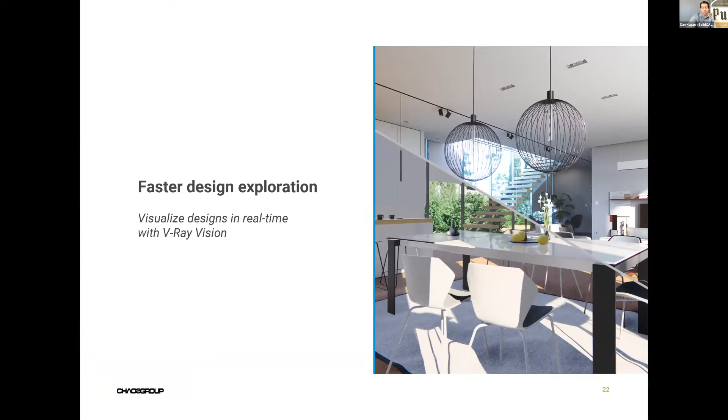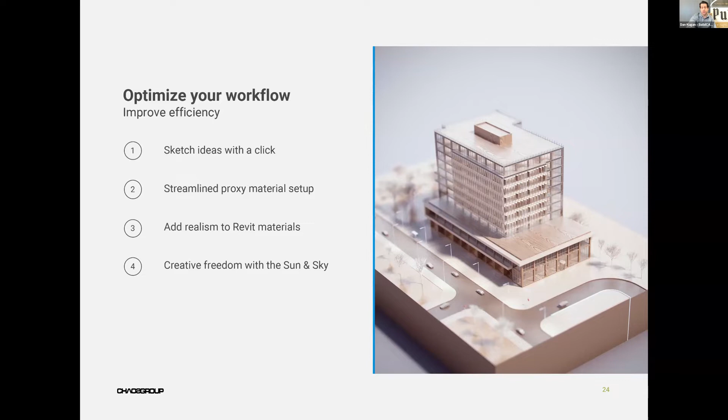Also, a reminder that V-Ray 5 for Revit will be officially released on February 23rd. I know there are quite a few users out there still loving V-Ray for Revit, so here's a quick sneak peek of what's coming. You'll see improvements on the GPU and CPU capabilities, more of the programming improvements from V-Ray 3DS ported into the Revit platform, improvements to the material library, and the ability to use V-Ray Cloud for fast tracking your rendering.

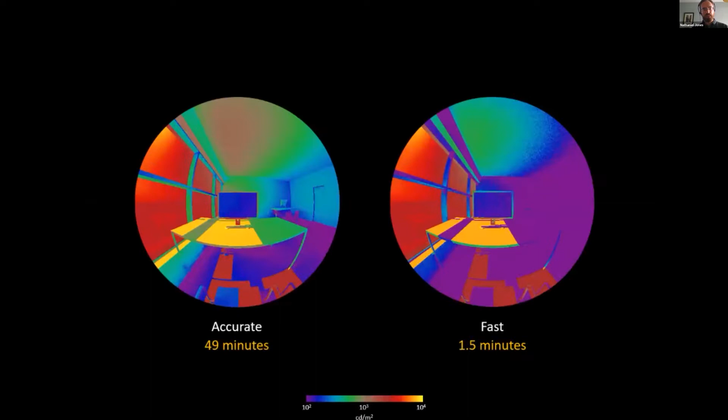I have a lot of experience working with tools in the lighting area, so I thought I'd show an example. Here you have a very accurate simulation of the luminous environment in an office, which took about 49 minutes to run. It's shown here in false color, so you can get a true idea of the range of light levels in that space.

And next to it, a relatively fast simulation, just a couple of parameter tweaks in order to get it to run quickly. But the result of running it quickly is you get a lot less light in there. If your goal was to make a decision based on that, you might see there's not enough light, and so you go and make larger windows, which could expose you to the possibility of overheating or glare. So do we want those models to run fast?

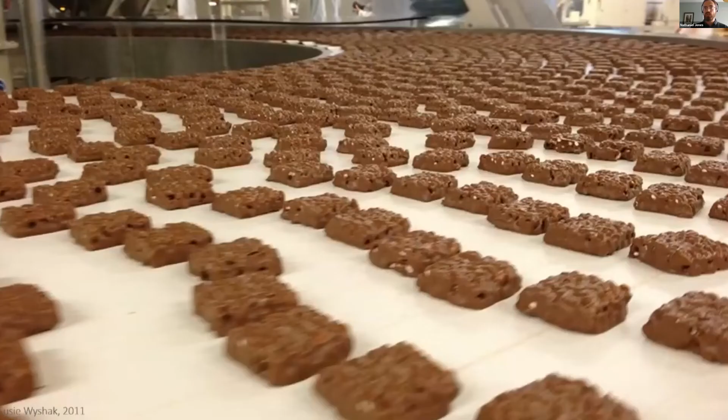So I want to contrast that with what happens on a production line. You need to make a whole lot of something at the same time. You end up with this conveyor belt and you're just mass producing it. That's a very different environment from that classic chef. And computers can do this too.

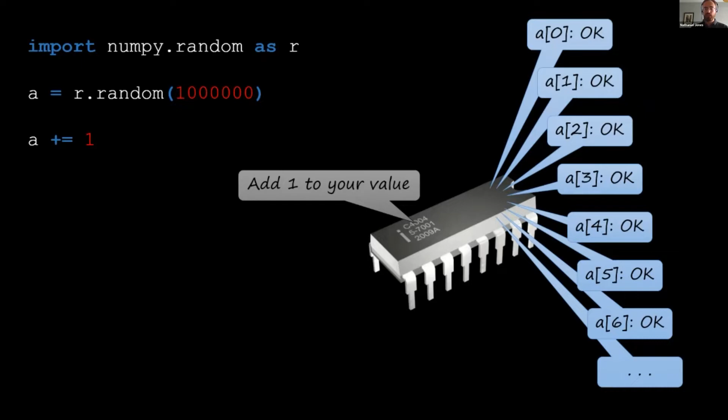So let's take that same array and just give it the instruction: add 1 to everything. The computer sees it like this. It gets this instruction, add 1 to this value, and all the addition registers say okay, and they do that to their value. Now we're replacing that for loop that took many steps to add 1, and replacing it with a single instruction. That can be significantly faster. In fact, on my computer, it turned out to be 30 times faster to do that than the classic for loop. This is a model we call single instruction, multiple data programming, or SIMD.

It's that SIMD programming. I want to go one step farther, and for this I have to go to a different language.

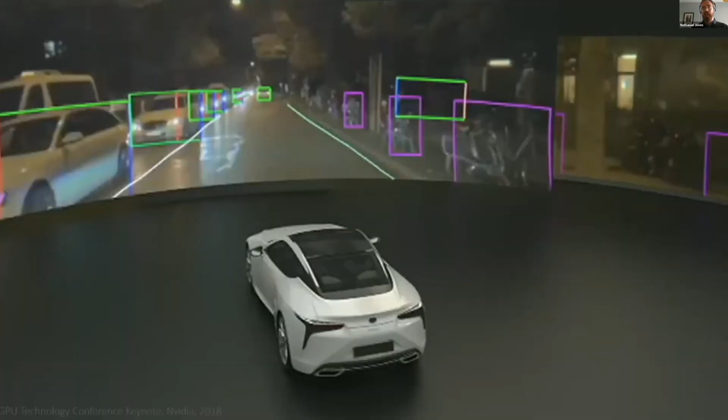That's done some really amazing things. Take this example again from NVIDIA, where they're training machine learning to understand the environment around a self-driving car. This car has to process everything happening around it. The scene it's in is a simulated image - it's not actually driving anywhere. It's just seeing this computer-rendered virtual environment.

It's using image processing to understand that virtual environment and identify the objects there, and then using that to control the car. The car itself is also virtual in this case. So you have 3 virtual elements interacting together in real time, so the real car can someday use that information to drive itself.

So all this is really amazing, but getting back to the question of designing a building, do faster tools make a difference? I mean, we know we like it when we can do things faster, but does it really help us? Does it make us design differently?

I tried to answer this question with the help of MIT Professor Les Norford. And I bring up his help because the one thing he did that was really great for me is he went on sabbatical and left his office empty and unlocked. What can happen if you're a university faculty and you leave your office unlocked is that some grad student can come in and set up a human subjects experiment in your office. And that's exactly what happened.

I brought in some computers and brought in 40 students and asked them to try to solve this problem where they had a mock-up of a room, and they needed to design it to have a nice luminous environment—enough light to work by and minimal glare.

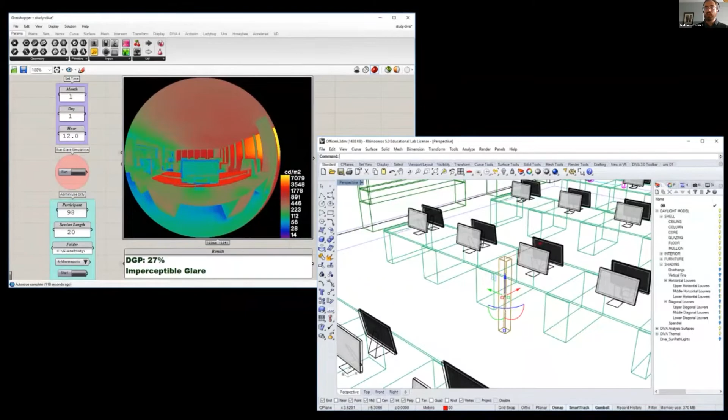The other method was using this tool that I developed called Accelerad-RT. The idea here is that you can move around as if you were in a video game. It's constantly rendering the luminous environment around you, and you can use that to edit the model to add in shading devices and see if you can create something that looks like it will have a better visual environment.

So adding in these blinds, changing the number of blinds in there, and then moving around to different parts of the scene to see if you can come up with something that you're happy with.

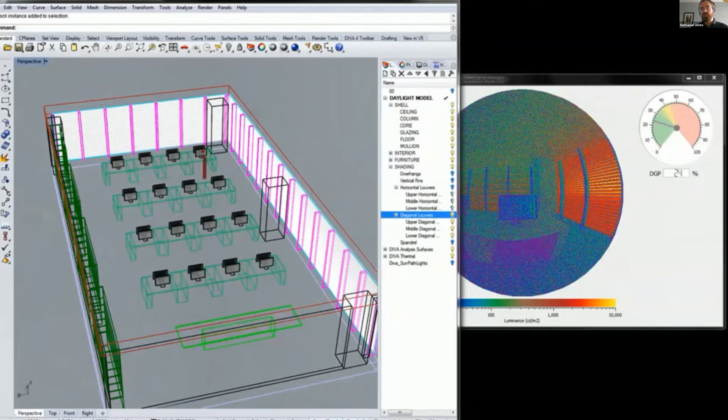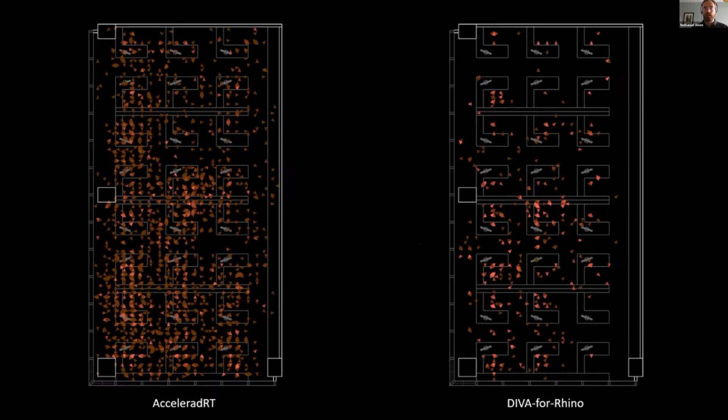So did this make a difference? One thing I found is that it changed the number of places where people actually looked—the number of viewpoints that they chose in these models. When they had the faster tool, they examined more viewpoints. Here the darkness of each triangle represents the amount of time cumulatively that all the subjects spent looking at those viewpoints.

It also changed their self-assessment of how well they did. The participants who used the faster tool were more confident in their assessment of glare and more confident in the final design that they chose.

They still found DIVA, the commercial tool, to be more familiar. In fact, only 18% of them found Accelerad to be more familiar, which is kind of amazing when you think about it, because none of them had used Accelerad before.

So they were more confident about their designs. But were they right? Did they actually choose designs that performed better in terms of giving more light with less glare? To answer this, I had to look at all of the possible designs they could have chosen and how much glare there was in each of those locations—that's 800 locations with 8 viewing directions, 2,000 hours during the year when the space is occupied, and 400-some different facade options that they could have chosen.

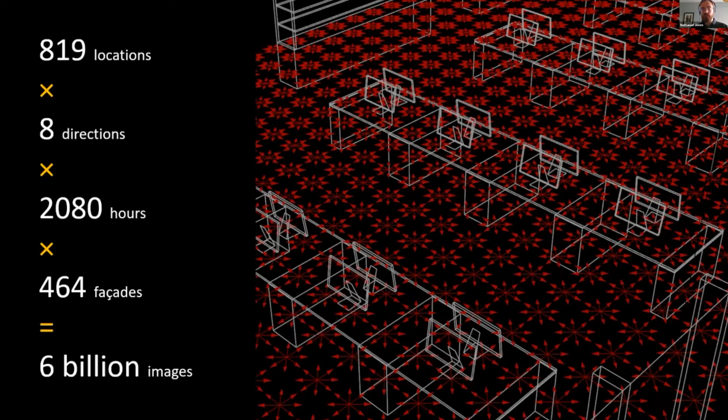If I want to render each of those to analyze how much glare there is, I need to look at 6 billion images. So how long does it take to run an analysis of 6 billion images? If I want to render them all out, it's going to take 250,000 years, which is a little more time than I want to spend.

It turns out there are a number of faster ways to do this—same problem, coming up with the same answer, but using different methods. Even using a CPU with some very efficient techniques, I can get it down to about 8 days. Running that same thing using SIMD programming on a GPU, with the CUDA language, takes it down to 2 days. And now with modern GPUs that have built-in ray tracing cores, that's down to 14 hours, potentially less with today's new GPUs.

So when you think about it, this is getting 156 million times faster, getting the same result just by changing the process, changing the way that I've programmed this.

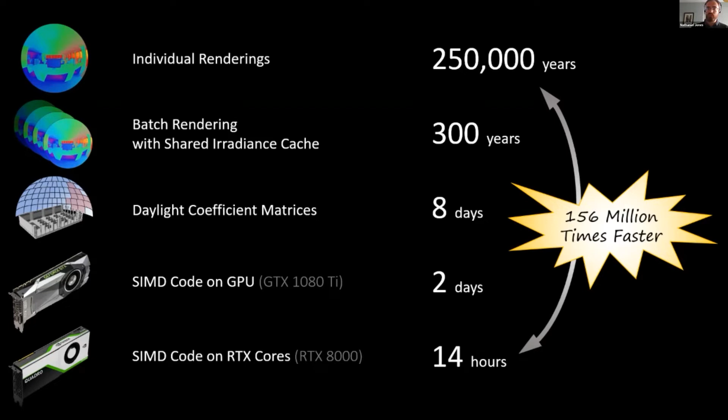So here I plotted out for each of the 2 scenes that the students looked at, how many options there were. Each little dot represents one option they could have chosen, with the horizontal axis being how well daylit the space is and the vertical axis being how much glare there is. Obviously, you want to be in the lower right corner, so you want a lot of daylight and very little glare.

And there's no perfect option, but there are a lot of options that are sort of close to perfect. They're what we call the Pareto Frontier, which is this lower curve here on each of those.

It turns out that in all, about 60% of the students picked Pareto optimal designs when they were using the faster tool. Only 40% of them picked Pareto optimal designs using the slower tool. So that's a significant difference made by having the faster tool available. And in case you're interested, here are the 2 designs that were chosen the most frequently, and they are both Pareto optimal designs.

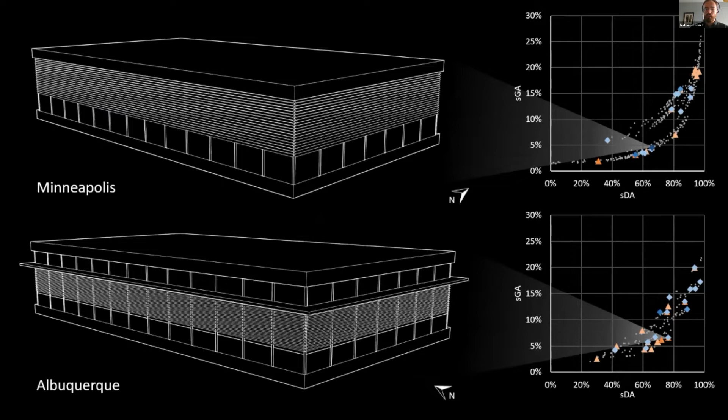So why? What was going on in their thought processes? Why did they come up with better designs using a faster tool? One possibility is maybe just looking at more options helped them come up with better designs. Well, it turns out that's not really the case.

If you consider the students who came up with Pareto optimal designs and the ones who did not, if anything, the students who did not come up with optimal designs looked at slightly more design options than the ones who did come up with optimal designs. So you can't just explain it away by saying they looked at more options and found better options as a result.

Some of the things that did matter: one was background. The students with architectural backgrounds were much more likely than the ones with non-architectural backgrounds to come up with optimal designs, but only if they had the faster tool. If they were using the slower tool, then it made no difference.

Also, those students who had had 3 or more years of professional experience before going back to school were much more likely to come up with an optimal design than students who didn't have that background. But again, only if they were using the faster tool. So what's going on here?

Well, the theory that I have is that you need a combination of a fast answer to your question and the knowledge of how to ask that question in order to come up with a good design. What the tool is doing is it's giving you the fast answer, but it's not replacing the experience that you already have.

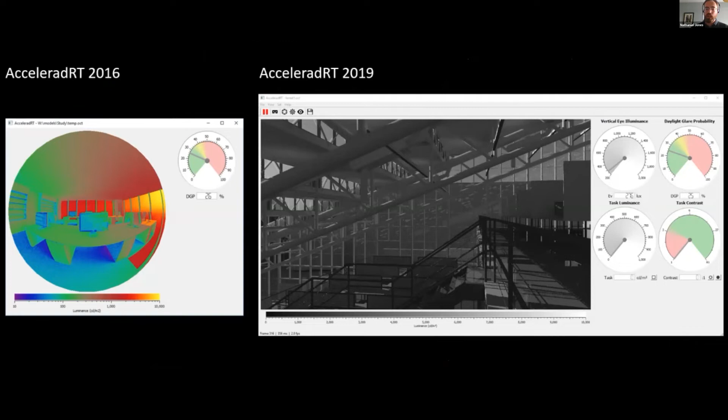Now, the tool has come a long way since then. That study was done in 2016. Over the last couple of years, the tool has become much more fancy. It's gotten a lot more widgets in it, but it still operates under that basic idea that you have this environment that you can move around quickly.

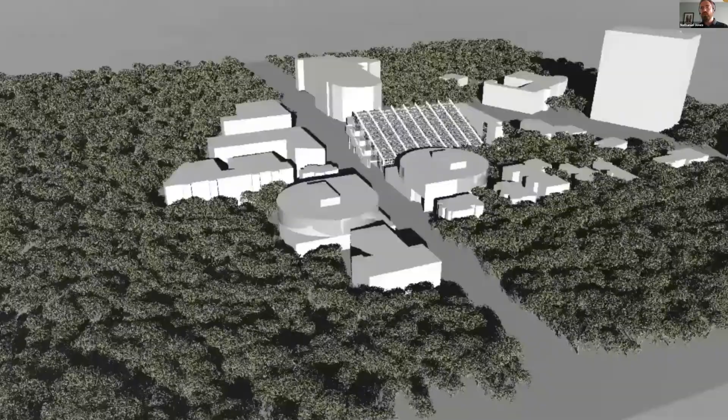Even this model with 1 billion polygons in it, something that takes a bit of time to render—yes, it is a bit jerky, but this is still real-time interaction. By offering real-time interaction, where you can move through a model and get live updates as to what the conditions of the model are, you're able to make better decisions. That's really the advantage that I want to show off with fast tools and why we should all work to build fast tools.

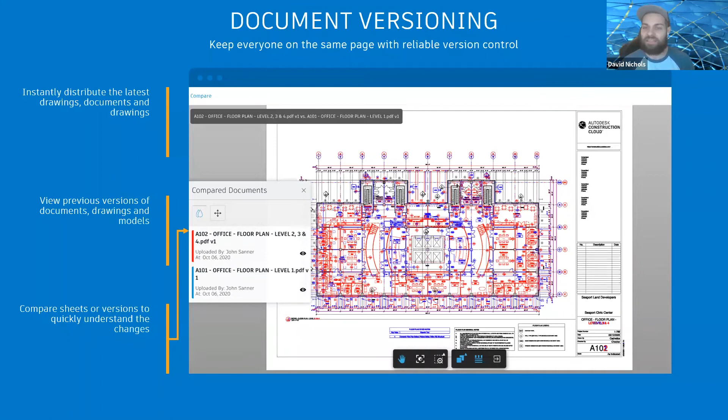From there, all the project drawings or models can be sent through an approval process, whether it's a single step or multi-step, linear or parallel, to make sure that all key stakeholders on the project are collaborating effectively.

Moving over to project management, I want to take a look at what capabilities are within Autodesk Build. First, we're going to talk about the ability to manage and oversee all project RFIs. This is where users have the ability to configure the RFI processes depending on how many reviewers or who needs to be part of the process.

Connect your RFIs like never before with project issues, potential change orders, even meeting conversations can be tied directly back to that RFI.

Streamline the submittal workflow directly within the Autodesk Build tool. Organize different items into packages, assign those out responsibly, and create reminders on a sequential, templated basis.

Leverage meeting minutes to structure effective and accountable meeting conversations by tying in due dates, assignees, and reference documentation such as RFIs, issues, files, and sheets, all under that same application.

Structure daily reports like never before. Standardize and templatize reports for easy access in the field. Capture more information with an easy-to-use template builder or leverage fillable PDFs.

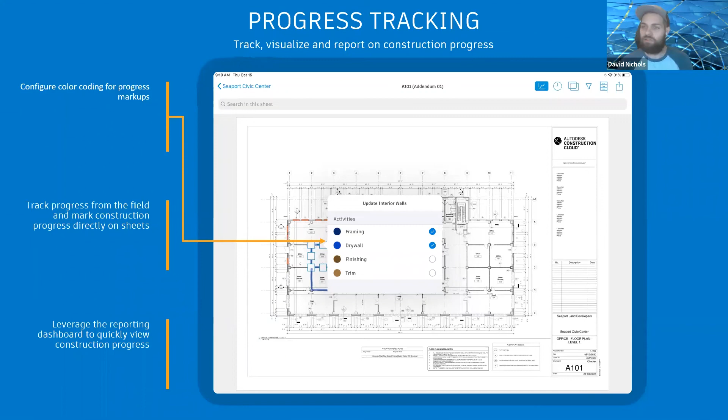This one is particularly exciting for me, especially coming from a field engineering background. Track progress directly on the drawing set based on categorical properties. Leverage these statuses to get a holistic view of the project development. Let me give you an example: I want to know how much of our overall steel actually arrived on site, how much has been installed, how much has been QA/QC'd, and how much is actually signed off and ready to go. This is where I see this coming into play.

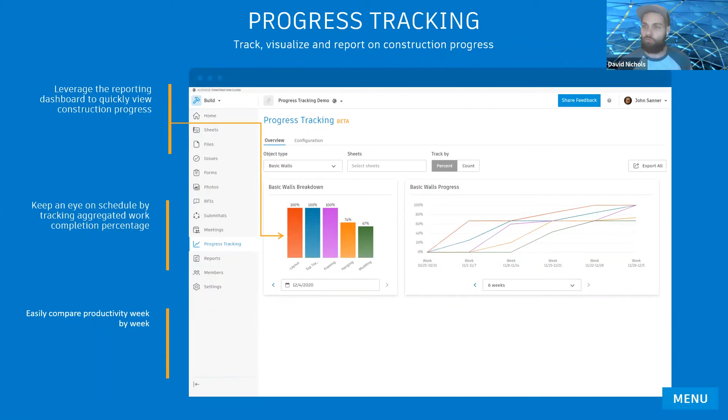And then, of course, track this progress, these stats if you will, directly in live dashboards, so you get a good holistic view. You get granular detail directly on the drawing, but also step back and see an overarching view of your progress tracking on your project.

Autodesk Cost also allows seamless communication between those project management tools we viewed previously and tying that back into the most important thing, dollar amounts.

Create and import budgets, contracts directly within the platform to manage and organize. Utilize, track, and manage the change order process, which could tie directly back into the project management and document management tools. Have that information hyperlinked so it's not as distant as something like an Excel file, where it's handled in the middle but has no connection to either direction. This brings those pieces of the puzzle together.

Utilize budget and cost payment applications to track pending and completed payments based on schedule values. A single source of truth for all cost information. Pull cost activities into budgets, forecast, visualize budgets and cost variance, and generate reports based on your budget and cost, all directly within the same platform.

Now, going back to my field engineer days, quality management. I want to take a moment here to speak about how Autodesk can really help you with your quality management, via quality planning, quality control, issue management, and punch listing.

First, we're going to create and distribute quality checklists and forms directly for field engagement, so they have the capability of filling out these documents directly in the field in an easy-to-use medium. On their mobile device, these reports can be accessed, viewed, and filled out. Think of the engagement you might get from quality documents, inspection forms, NCRs, just to name a few, by giving the tools directly into the worker's hands.

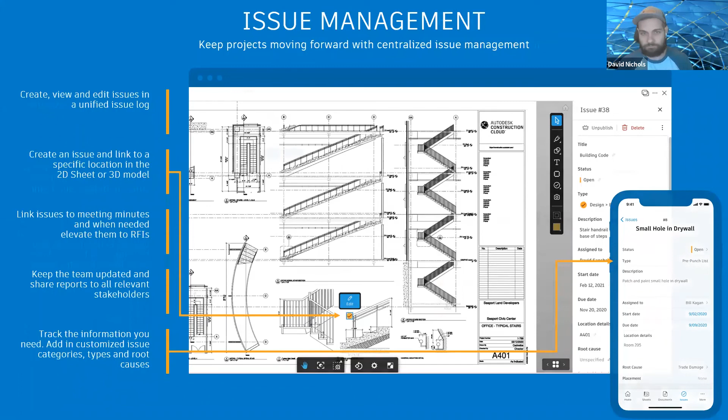All project issues from any phase of construction are assembled in one centralized location. We're talking the same terminology here, issues could span every phase of construction. Bringing it under that one keyword allows you to filter, allows for transparency, allows you to generate reports, promote quality and safety culture, and of course, plan work accordingly.

And then, of course, the last thing we're going to talk about on Autodesk Build is likely the last step in the construction process: project closeout and commissioning.

Track individual assets throughout the construction process. Track issues related to those assets, and associated care and preservation checklists, and status them. With the barcode and QR code capability, go to the field, pull out your mobile phone, scan for these assets directly on site, create issues, fill out reports, add photos, and review warranty information, all through the same mobile application.

You're taking advantage of those project management tools. For document turnover, it's never been easier. Since you collected all your project data within the foundation document management module, simply download everything required and package it off.

So let's take a moment here to acknowledge two other tools which are going to be assembled in the unified platform: Autodesk BIM Collaborate and Autodesk Takeoff.

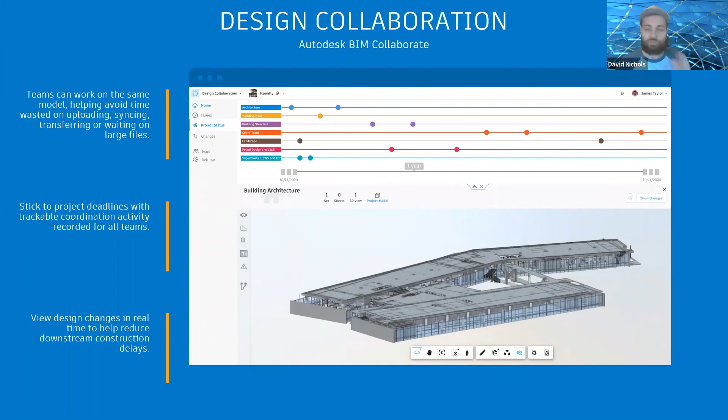Let's start with Autodesk BIM Collaborate, the design collaboration tool. With that, you'll have the capability of doing constructability reviews, change visualization, and collaborating on 2D, Civil 3D, Plant 3D, and Revit directly within the platform. BIM Collaborate also includes the model coordination portion.

A good saying I remember from the field is: for every $1 you spend in model coordination, you save 10 in the shop and 100 in the field. So BIM Collaborate will allow you to automate the clash detection process by leveraging that one center source of truth, that common data environment mentioned earlier.

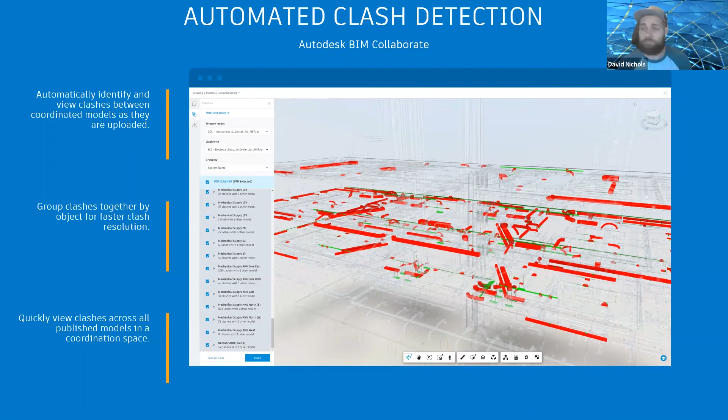Pull models directly in from that center source of truth and let the system automatically do the clash detection. From there, once those clashes are determined, our industry-leading issue management platform, the very same one mentioned in Build, can be used to communicate clashes to resolve, assign accountability and due dates, capture lessons learned, and stay on top of the clash detection process by being proactive and eliminating the VDC bottleneck.

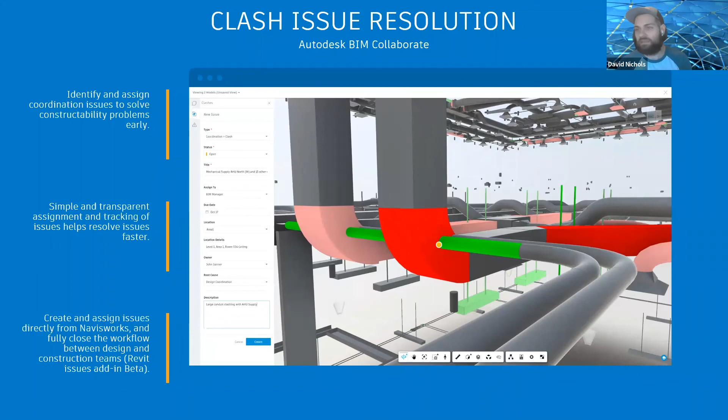Let's dive into Autodesk Takeoff and show you some of the interesting things we're doing here. Not only does it have 2D quantification capabilities, it's also going to have 3D capabilities. The new Autodesk Takeoff module will allow your team members, whether estimators or pre-con managers, to minimize the tech stack required for pre-construction workflows. Your team will have the ability to access all project documentation from one center source of truth, complete quantity takeoffs, and push this information downstream to the construction workflow.

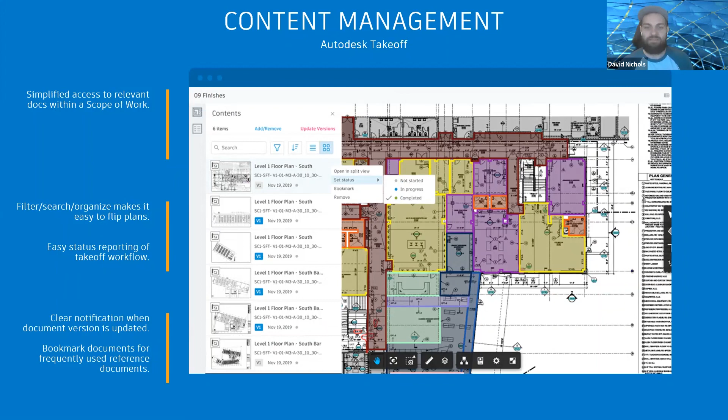Your teams can also create takeoff packages and easily access all relevant documentation they need to complete their takeoffs. They can search for documents, sort them in a way that makes most sense, and bookmark the sheets they use frequently. From there, the team can create their own takeoff items, different areas, different volume formulas, and the system will automatically tally everything up for that holistic view on the takeoff package within our inventory.

Your users can also dive into the 3D models for the workflow. They can view section cuts and take a look at the model properties. From there, they can easily create their takeoff items and visually track their quantification by the colorization scheme you see here.

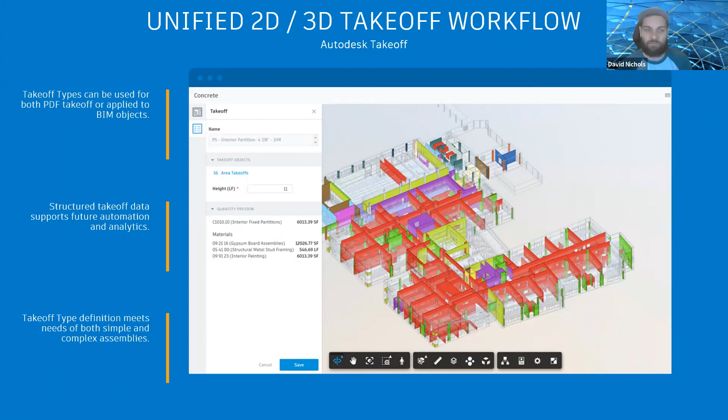And lastly, all this information rolls up into an inventory where users can filter the information by different groupings, take a look at the quantities in a more granular way, and from there connect the information off to their estimating solution.

So we've got all this rich data under one umbrella - what do we do with it? How can we leverage the data we just collected through the entire project lifecycle? Well, that ties us back into Insights.

We start off with robust reporting capabilities, which can be scheduled and shared on a timely basis. Filter information regarding RFIs, submittals, cost, etc., to a scheduled time and let loose. A great example would be a GC leveraging these automated scheduled reports to create a report every Monday morning of open and outstanding RFIs yet to be answered, and sending that off to the architect, just to name a few.

User-friendly dashboards clarify work that needs to be done on an assignee level or a project level. That can be a great way to ensure nothing is forgotten and nothing is swept under the rug.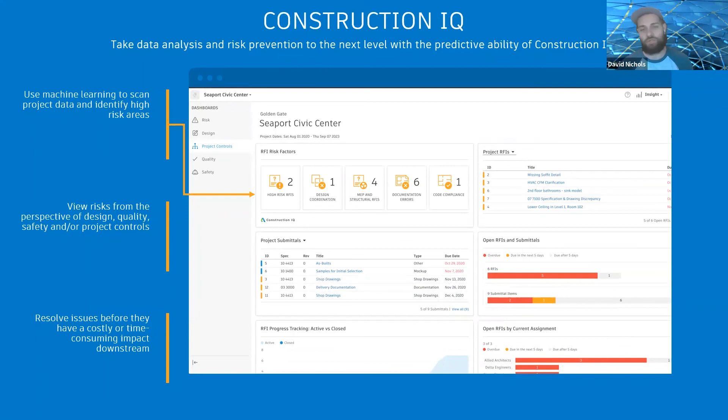And of course, Construction IQ. Leverage the machine learning behind the platform to scan project data to identify risk areas associated with design, quality, safety, and project controls - nipping these trends before they become costly or detrimental mistakes. Construction IQ spreads from individual project levels all the way to the project portfolio, quickly identifying this information by leveraging that rich information hosted within the platform.

Now, I'm not here to tell you Autodesk is going to be the end-all be-all. We're not going to be your site cams, we're not going to be the development, maybe we won't be able to develop that dashboard you absolutely love on Power BI, we might not even be your resource management platform. But what we could do is partner with industry-leading solutions to natively bring you that information directly into Insight.

And with that mentioned, finally, the need to store documentation locally is an absolute necessity. Data Connector can help extract templatized data locally.